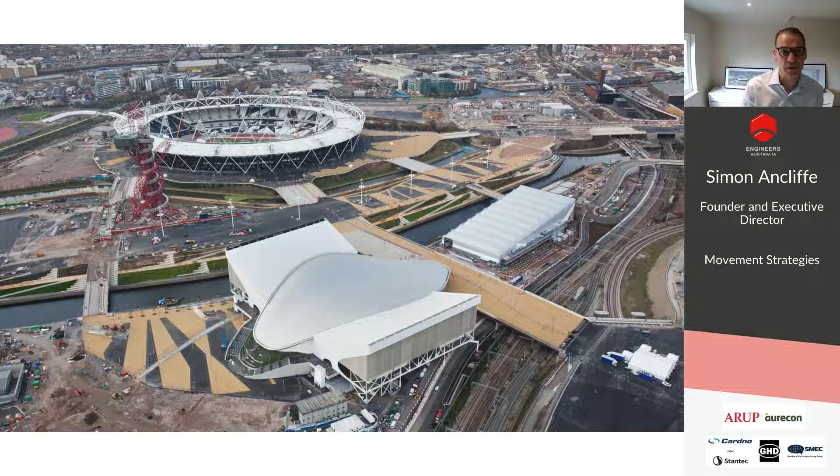And that's shown in the next slide, where this is a snapshot from a simulation that I'll run of the Aquatic Centre on one of those two temporary stands. It shows a number of colours. The colours represent people from the different groups. So blue are non-competing athletes, green is media, purple is Olympic family, orange is wheelchairs and their companions, and yellow represents general admission. And you can see those groups are separated, and that's because the Olympic rules require that Olympic family are separated from media, separated from non-competing athletes, separated from general public.

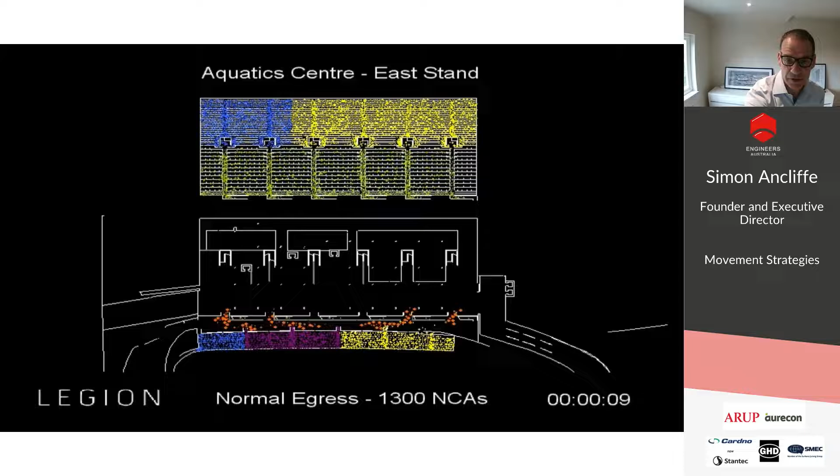And so the movement pattern is quite complex in this venue. And here we show a simulation of people leaving under normal egress. In this scenario, there were 1,300 non-competing athletes. And the people are making their way to lifts to be carried away, or to stairs to get out of the building within a certain time. So the concept of operation for this venue is complex for the games.

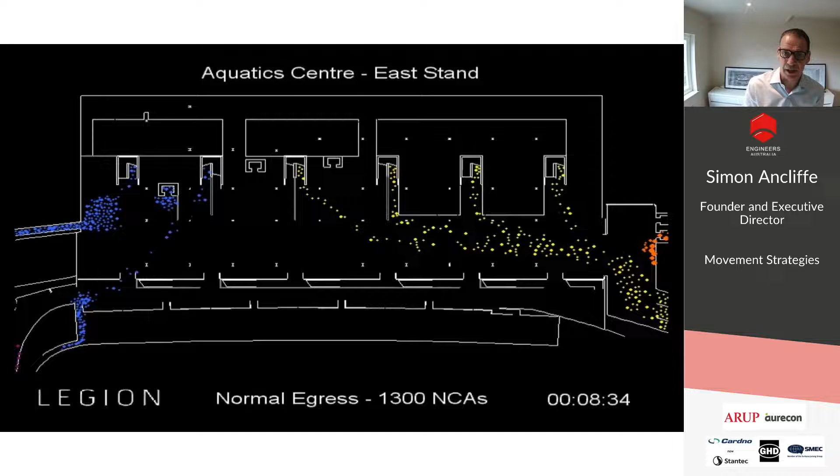And of course it's also a temporary and permanent structure, making it more complex and costly as well. So it's a common theme that you need to understand the concept of operation for venues before getting into the design.

And that's true of the Olympic Park as a whole. One of the other things I want to tell you about planning for Olympics is that it takes a number of years. For us in London, we had the Games awarded in 2005 for 2012. Brisbane has a bit more time, but conversely Melbourne has much less, for the Commonwealth Games.

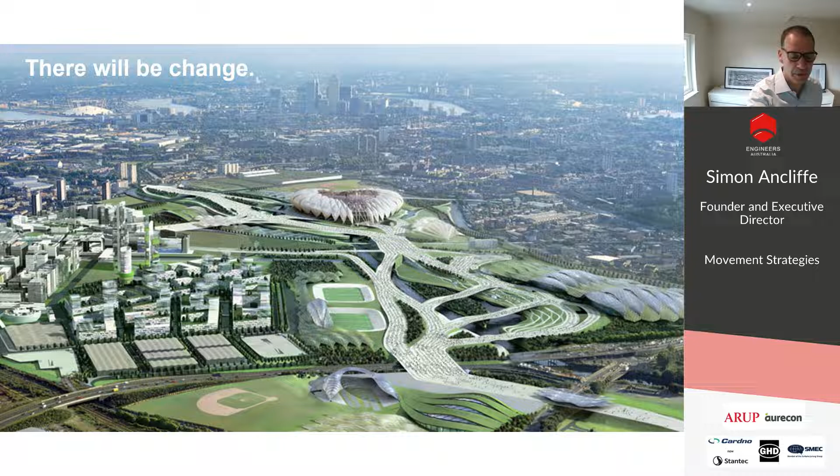So this was the master plan presented in the bid and subsequently developed. It shows a model of an Olympic stadium, a basketball venue, lots of wide paths through an Olympic park leading down to a river with 3 bridges. You can see a baseball centre, hockey pitches on this side of the river, and this was a fencing venue. In the background, you can see what is now the O2, but was previously the Millennium Dome - an asset that wasn't very successful in its original form, but went on to become a very successful venue in legacy. So let's see what was actually built, and you can see a rather different looking Olympic stadium.

What was the basketball venue is no longer there and has moved up to here. Hockey pitches have moved across to this side. You can see a velodrome in the foreground. You can also see an unfortunate bit of infrastructure in the Olympic Park, which was an electricity substation that couldn't be moved. And where previously there were 3 bridges, there are now only 2.

Crowd planning had a fundamental impact on all of those aspects, except the substation, which couldn't be moved and was in the way. But you can see the size of the park, the general circulation area, known as the common domain, was affected by crowd planning. In other words, we specified the size, as we did the width of the bridges. You can see these are sizable and expensive bridges, and there were 27 of those in the park. We also influenced its shape, and I'm going to come on and talk about how that happened and why that was the case.

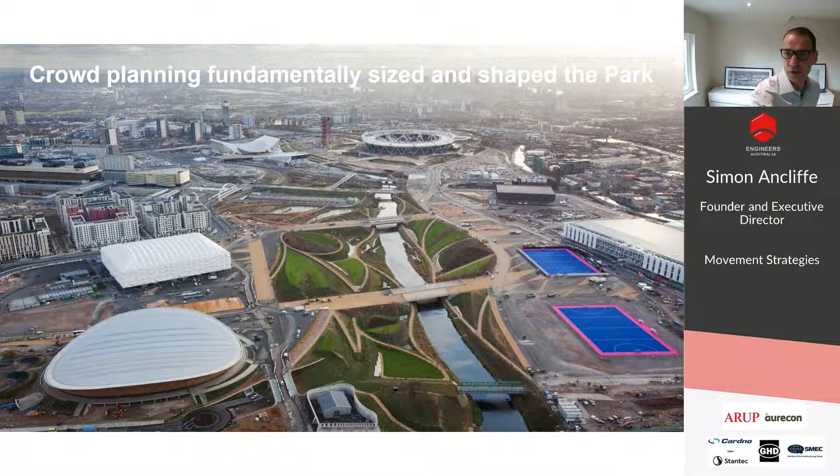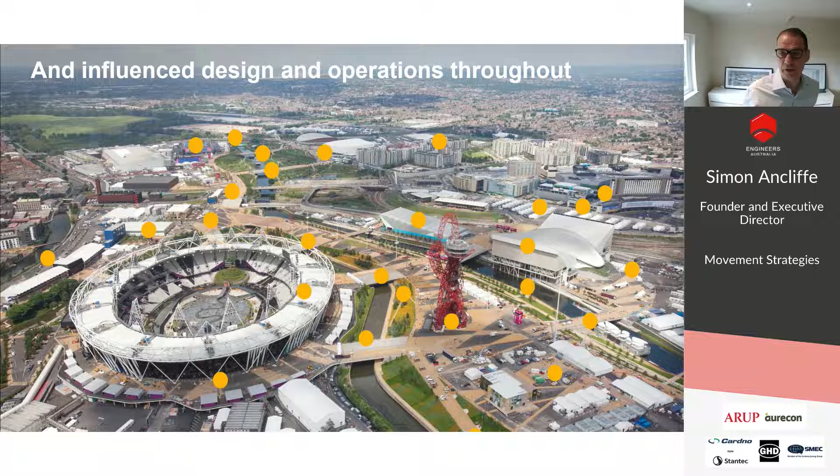But you can see that the baseball and fencing have gone, recognising the cost pressures as you start to develop the games. I've also put in on this diagram a dot representing everywhere that crowd planning had an impact in this picture - both design and operation. A common theme I want to talk about is the integration of operation, the concept of operation into design. So how did we go about that?

First of all was setting the crowd planning principles. There were no design guides, and there aren't for an Olympic Park. So our overriding principle was that the park needed to be comfortable but busy if it all goes to plan. But we would accept uncomfortable, as long as it was safe, if it doesn't go according to plan.

We then started to quantify those by putting the design principles into what was called a crowd movement data book. That was also important at the time because we had new guidance coming in from the Sports Ground Safety Authority in 2008, just as we were about to write the design standards, setting out the numerical parameters for how crowd flow should be accommodated. There was a change, so we had to accommodate that.

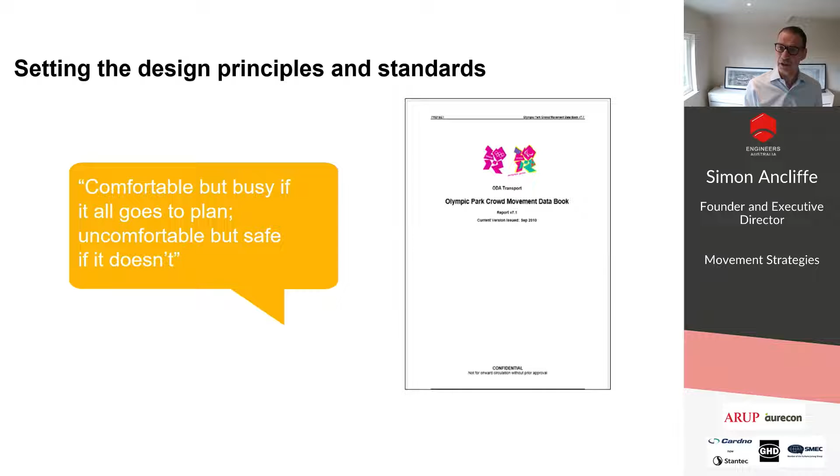At the same time, we also wanted to understand how many tickets were going to be sold and how many people were in the park. The data book captured all that data and other parameters like security screening rates or transport plans into one document, which was version controlled. So as change happened throughout the development of the games, we were always able to reference back to a common set of assumptions, which is important when you've got thousands of people in different teams from different functions or different venue design teams, all trying to bring together an integrated plan.

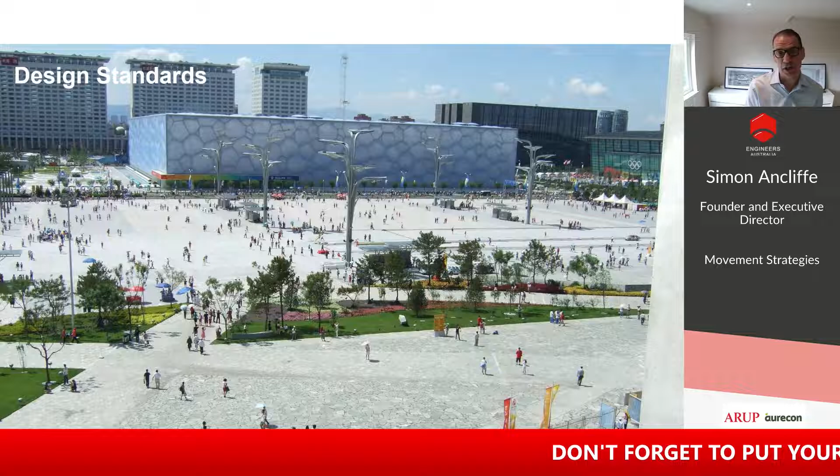In terms of design standards, this is the Olympic Park in Beijing, looking across from the Bird's Nest Stadium to the Water Cube, their aquatic centre. You can see there's plenty of space there, but arguably it was not vibrant enough - in other words, there's too much space per person there to give it real vibrancy. And it was hot and rather sterile in that park.

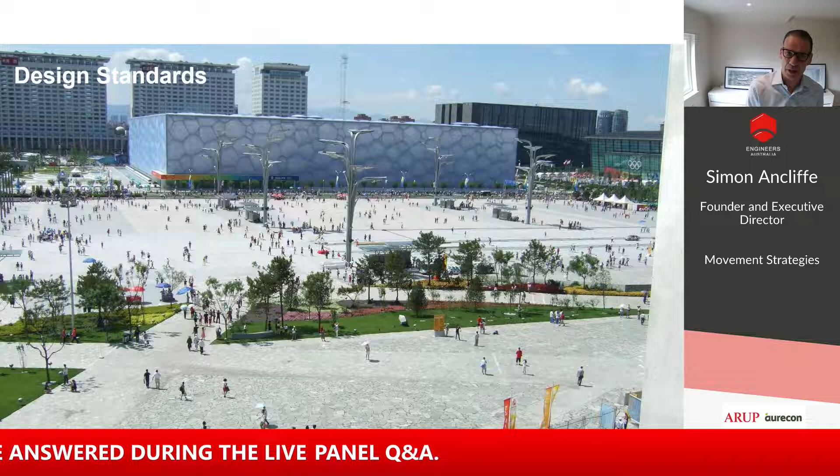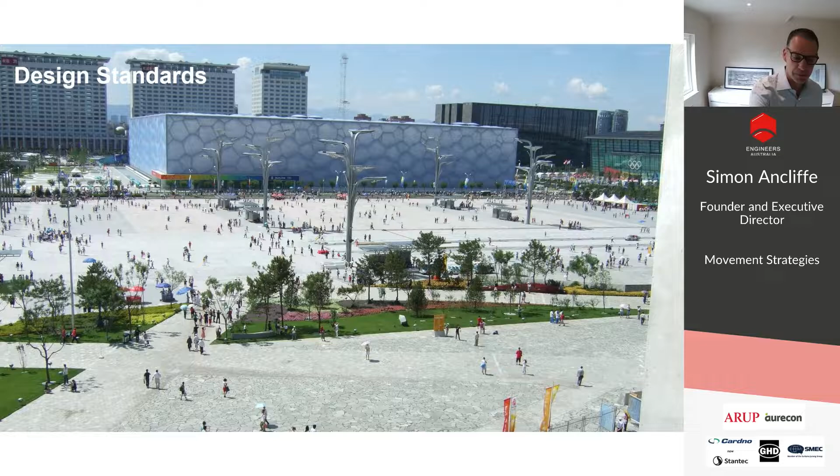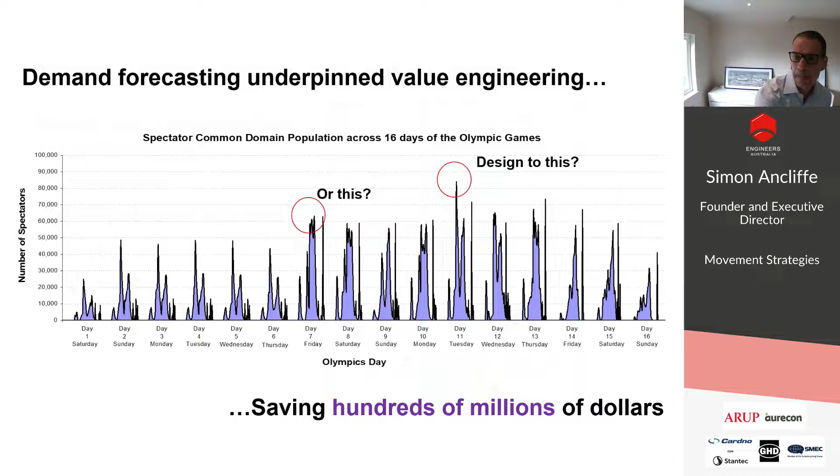The next thing we did was try to establish the movement patterns in the park, and again that will be the case for a precinct or a city - where people are coming from in terms of transport, and how they walk around the park. So we considered the arrival and departure profiles via each transport hub, and then started to think about how people would circulate if they were visiting one or two venues.

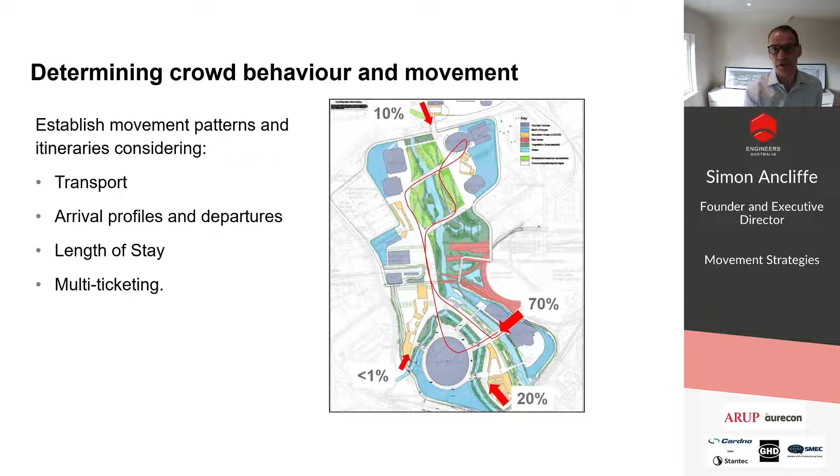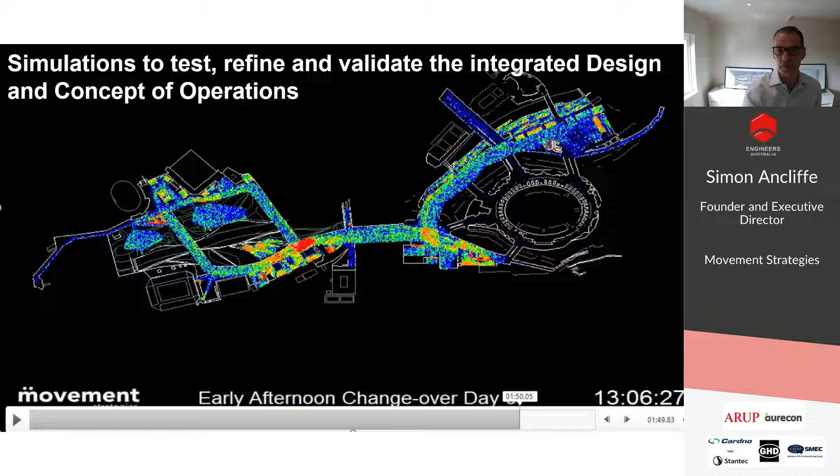As we ran this simulation on a scenario - the early afternoon changeover between the morning and evening sessions of the Olympic Stadium, which we had identified as one of the busiest periods - it allowed us to see whether the circulation widths in the precinct were wide enough, and where the orientation and arrangement of venues created difficulties. There's clearly an area here in red representing high density, where we had to pay attention to what kind of merchandise, food and beverage overlay, toilets and other facilities were in this area opposite this junction. So the design changed as a result of this kind of analysis.

In 2005, when London was awarded the games on 6th of July, unfortunately we had a terrorist attack on 7th of July, 7/7, and so security was a major consideration throughout the games, as it always is now. The others, by the way, were transport and cost - those are the constant themes that people try to evaluate and make work throughout the planning for the games.

And of course, this thing about cost means the organising committee wants to get revenue, and one of the main ways of doing that is from sponsors' hospitality.

This prime spot meant the organising committee wanted the security screening to be as minimal land take as possible. But of course, everybody knew that security had to be good. So we had to test what the security process was, what security equipment was needed to implement that process, and how many people were going to arrive over what time periods, and from what routes.

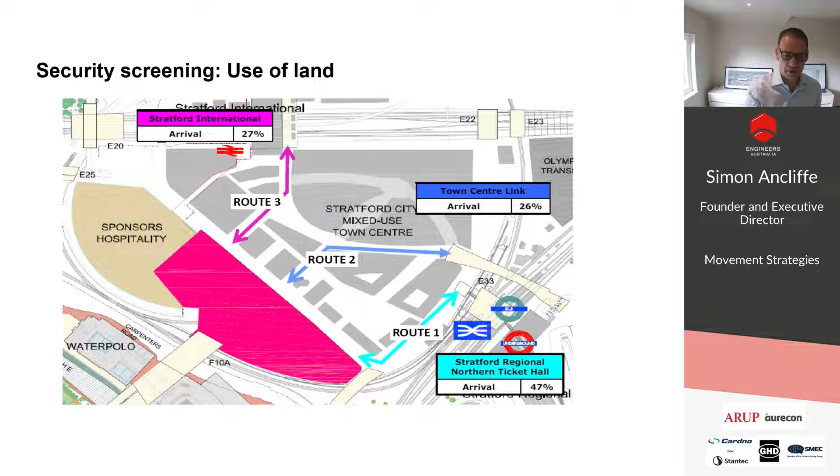I'll come on to transport in a bit, but people arrived at this major entrance via three different routes. So we did lots of scenario testing and design work before arriving at a particular design, which was then tested again using crowd simulation.

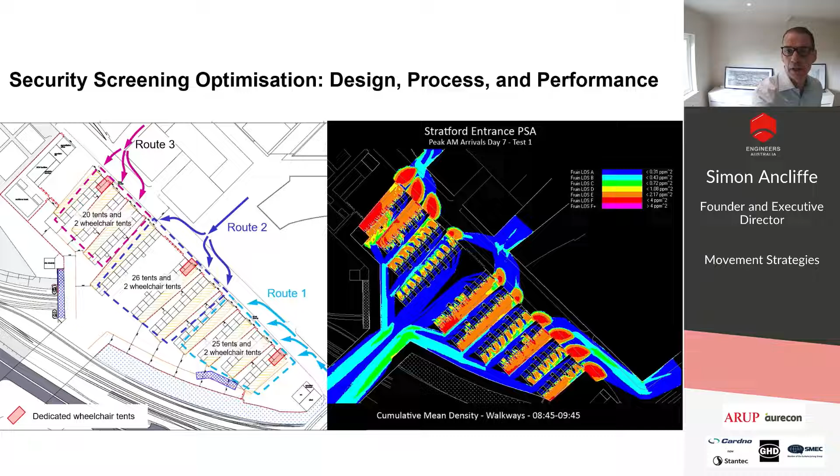Here's a schematic of that. In blue you can see I've put three subways under the railway lines connecting the station. The yellow represents all the different platforms, 17 of them, serving various train services. In purple there are three ticket halls: the Southern Ticket Hall, the Mezzanine Ticket Hall, and the Northern Ticket Hall. So it's a complex station, and last year it was the 5th busiest station in Great Britain.

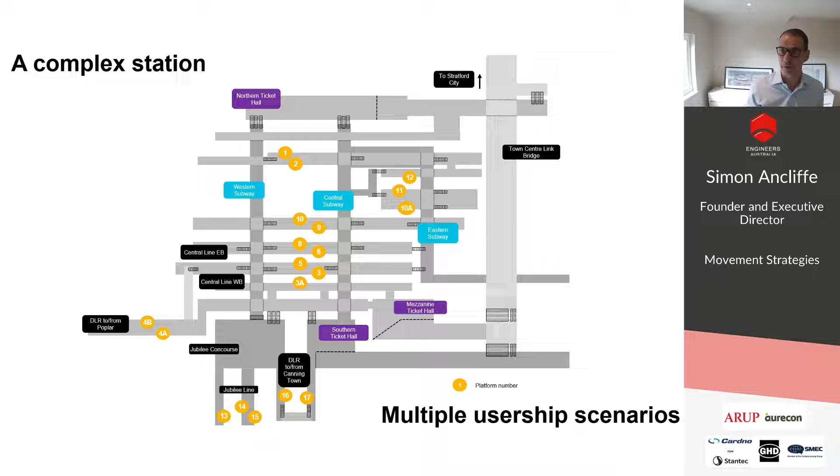Making sure that the new complex station could work under all those scenarios was quite a piece of work. And we also had to make sure it worked during the construction process in advance of the Games as well.

So once again, we did the analysis, but ultimately it led to doing a crowd simulation. Here the red represents the queue. In this case, it's not a problem as people go down the stairs from this Central Line platform. But the central thing we had to test was to make sure this queue could clear before the next train arrived, so it didn't build up back along the platform, which would be unsafe.

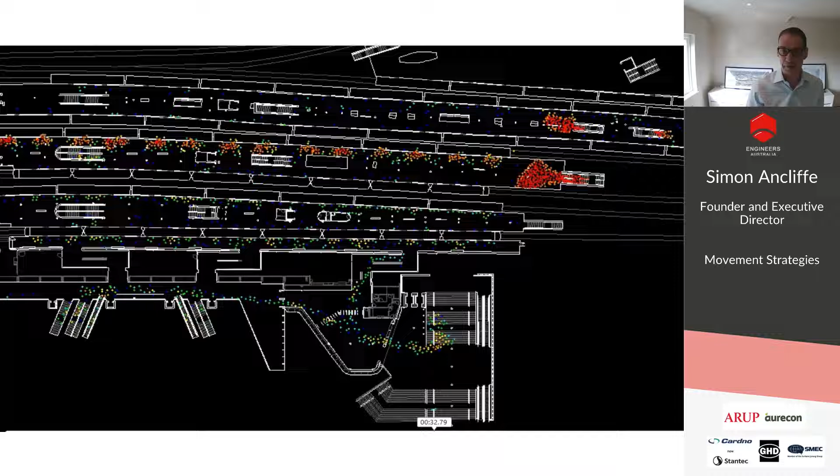You may remember I mentioned the Stratford Steps. Those are shown here next to the Mezzanine Ticket Hall. There's the bus station, there's a queue for people coming in, and people could head off this way also to the shopping centre. This was part of the last mile.

Last mile, sometimes called grey space, is the area between the transport hub and the venues. Over the years, during the London Olympics but also in years subsequently, planning of the last mile has become more of a major exercise for mega events.

This location shows some of the problems. When we first started planning it, there were a number of different stakeholders involved: the stakeholders for the bus station, for the transport hubs, Stratford City and the local authority, and the organising committee, who would have to manage the crowds down these steps.

Everybody wanted to say they will do it, but after a while, as they realised the costs and responsibilities that came with managing the last mile, they actually wanted others to do it. It's very important in the last mile, where you've often got overlapping land ownership and therefore responsibilities to manage the risk or financial transfers of the cost of operation. So planning for the last mile, which is uncertain and often public access because people may not be ticketed, can be quite complex. I am undertaking another mega event where last mile planning is coming later in the process, and it throws up some difficulties.

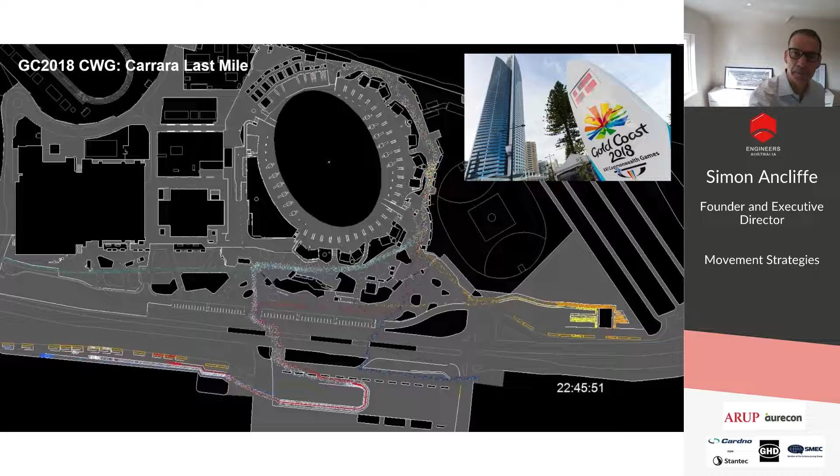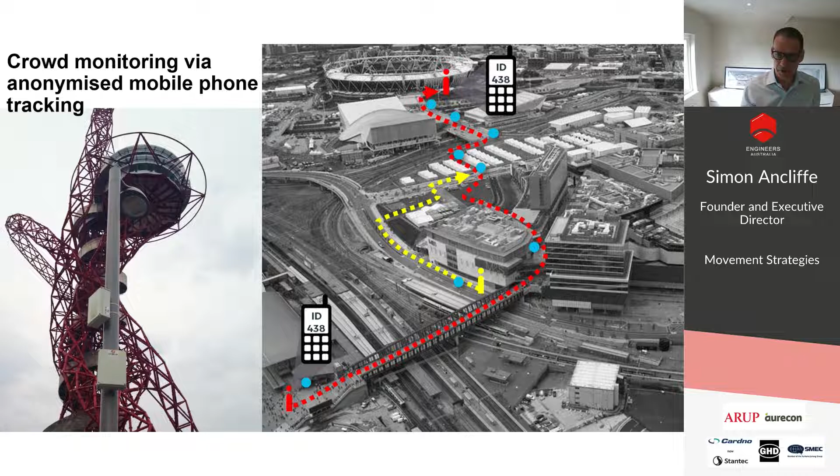During the London Games, we used Bluetooth to monitor the number of people coming each of the routes, in this case shown in two routes. The blue dots represent where there was a location for a monitoring system, and at that time we used Bluetooth. The reason for that was we wanted to understand the length of stay of people within the Olympic Park, because the length of stay affected the overall number of people in the park, and that was obviously a safety consideration. So we wanted to understand that, and we wanted to understand how these two routes were performing and what was the delay at the security screening area. So we put up Bluetooth sensors to understand. These days, people tend to use Wi-Fi because more people have Wi-Fi on than Bluetooth, but there are different ways it needs to be analysed because the pickup rate is not quite as fast.

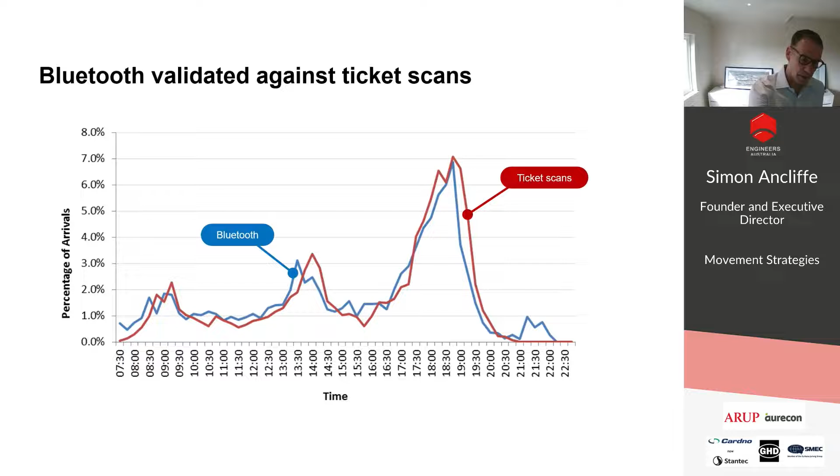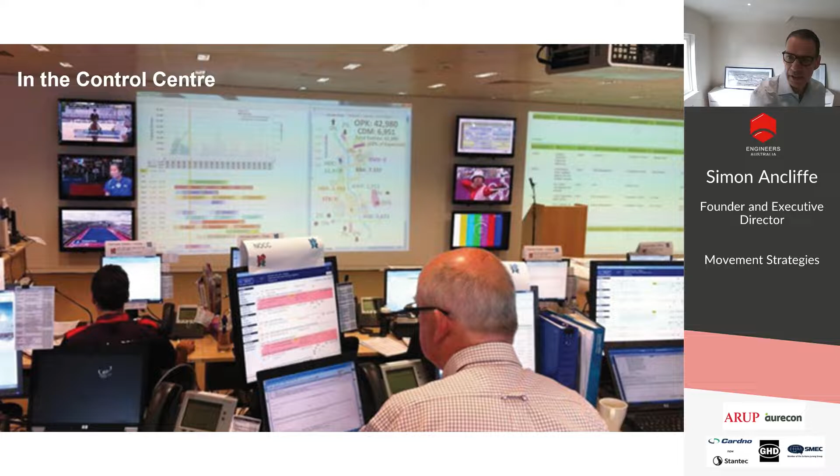We checked the Bluetooth against ticket scans. As you entered the park, your ticket was scanned, so we were able to verify that this remote monitoring worked. We used that in the control centre, where the data coming in was compared against the forecast we had from the previous day, or the forecast for today's activities, which could be compared with how the park and the transport system were actually performing. We could also use the evidence from previous days and people's behaviours to predict what might happen that day, and that was enormously helpful in a number of different ways.

So we measured the population, the length of stay, and their entry and exit routes, and that allowed us to forecast the next day's activities. One consequence of that was that we closed the Westfield for the two busiest days of the Games. We knew that we needed that extra capacity without the attraction of that retail centre. Obviously that is a large impact decision with financial consequences, so it had to be well evidenced.

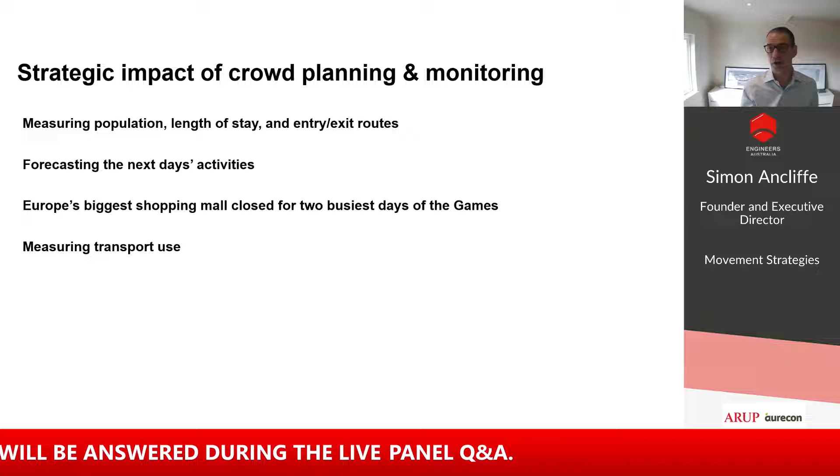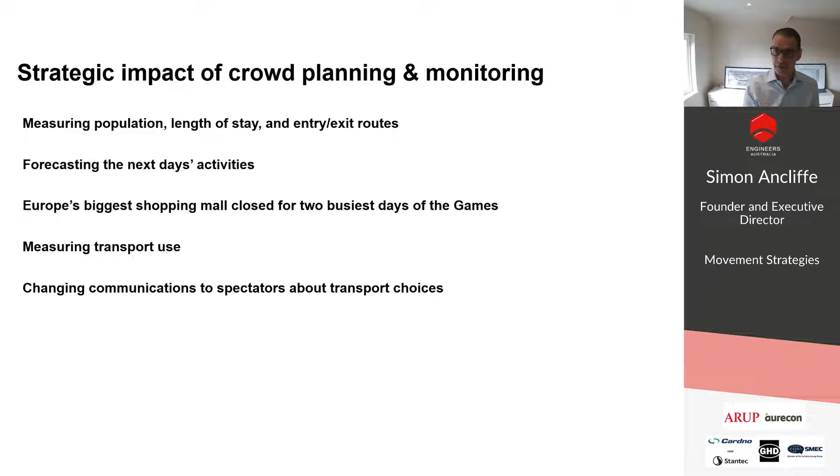We also measured the transport use. There were a number of different transport routes to the Games and to Stratford Station, and by measuring that, we could talk to spectators about their choices and encourage them to use different systems that would allow them to get to and from home more quickly, so that the transport system worked in the way that we wanted it to.

It was also true that we could say in the papers in London that day, or on the news, 'this is what happened today, and this is why it happened. It was entirely expected, and tomorrow this is what's going to happen. So if you don't want to be delayed, don't go by this station, but alternatively go by that station. Everybody else, it'll be business as normal.' And so that absolutely allowed Transport for London to get on top of the media and communications about what was going on.

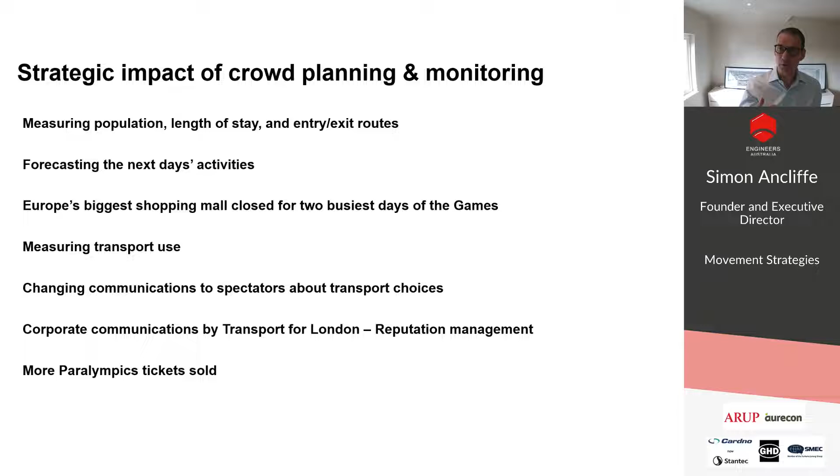And we were also able, because we understood behaviour, to sell more Paralympics tickets, generating more revenue for the Games.

Coming off the Games, one thing I really wanted to emphasise is that an important part of crowd planning, when using existing venues for Games, is that they'll undoubtedly require refurbishment, and normally they'll be closed while that's going on. But in some cases you want to keep the venue operating if you can, which has financial consequences. That could occur at the Gabba, where there'll need to be some upgrading of the venue and potentially the precinct around it, possibly quite significant. If that's the case, it makes financial sense to keep the Gabba operating as long as possible.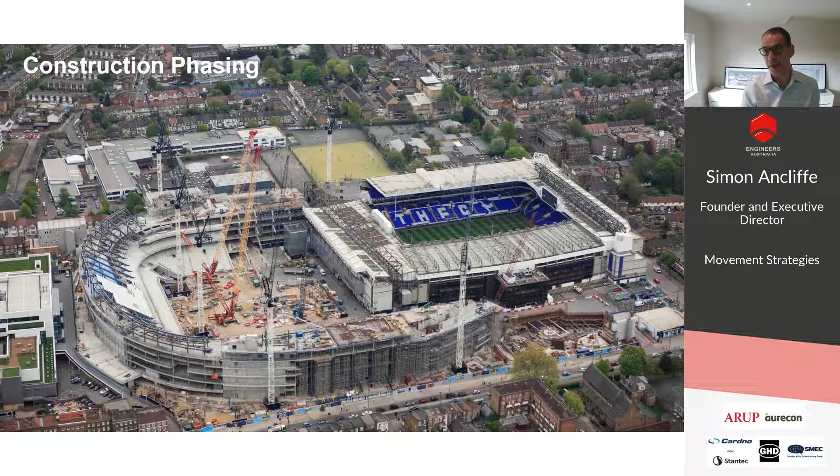So at the start, I said I wanted to talk about the value of crowd planning. First of all, the Games was voted the best Games ever by the IOC, and got a gold medal for that. I think that was in part due to the visitor experience, but it was clearly based on ensuring it was a safe and secure game.

So back to the original question: can't we deal with safety and security two years out? Well, actually, we started to deal with it six years out, and obviously many people were involved in ensuring it was safe and secure, but crowd planning was part of that.

We helped the organising committee and the delivery authority get licensing and planning approvals necessary to operate venues. Sometimes that was through analysis, other times through using simulations to communicate to non-experts about how it could work.

We can help with construction phasing to make sure the venues can operate. For example, Westfield, which was still under construction during the Games, allowed for sufficient walkways so people could get into and out of the Olympic Park.

We absolutely reduced the risk, and by planning beforehand and getting everybody on board, we made sure it worked right first time. We saved hundreds of millions of pounds or dollars in costs for the Olympic Park, and also made the park easier to operate.

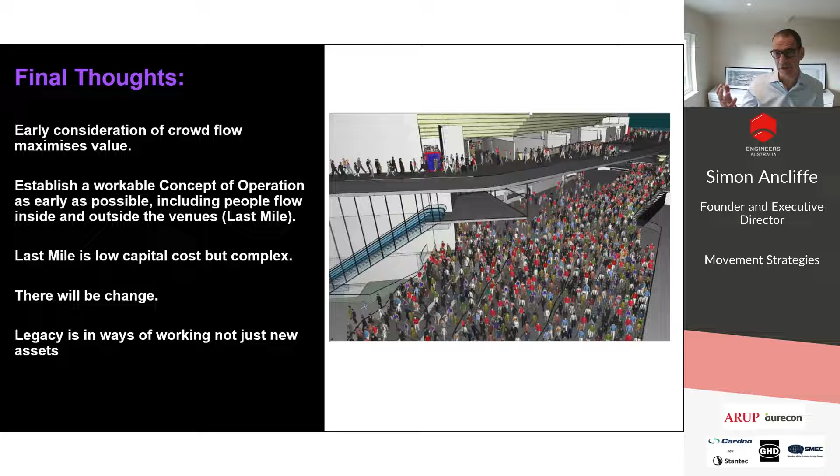To the right, there's a simulation now in 3D. The way that venues and transport assets and indeed games are planned now, we've moved from those old 2D simulations to 3D and to digital twins. And that for me is a setup for the next presentation.

So at that point, I'd like to take questions, and I thank you for your time.

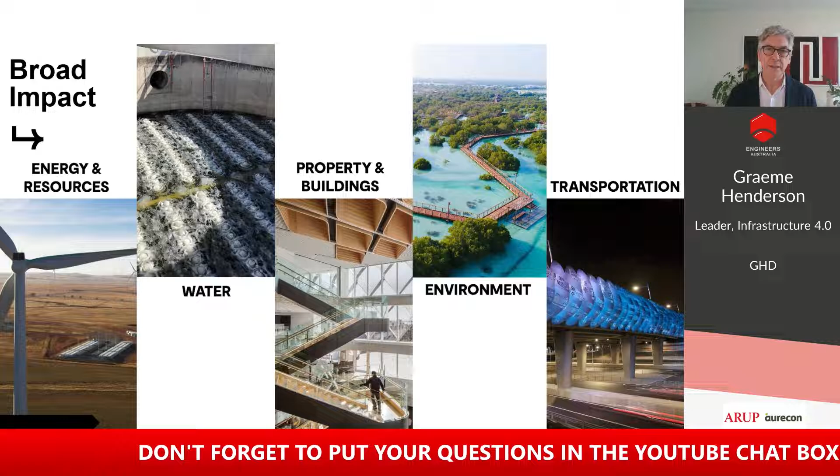Now, we understand that the impact from this event will be very broad, and it'll cover many of the aspects that we as engineers get involved in on a day-to-day basis. So how do we do that?

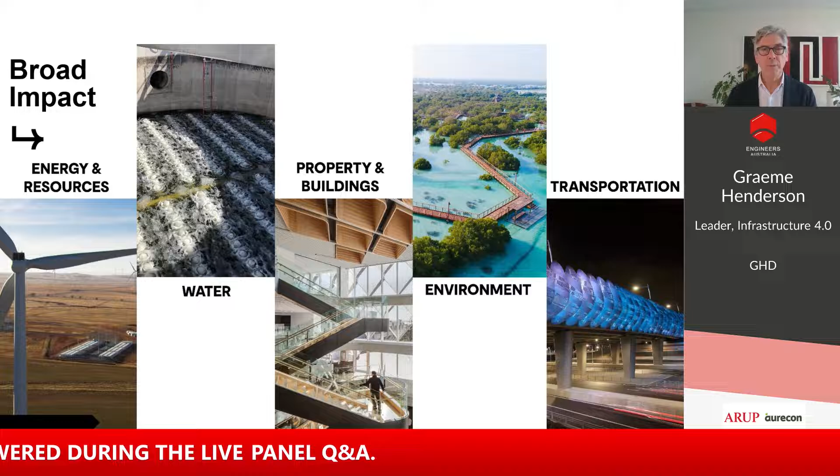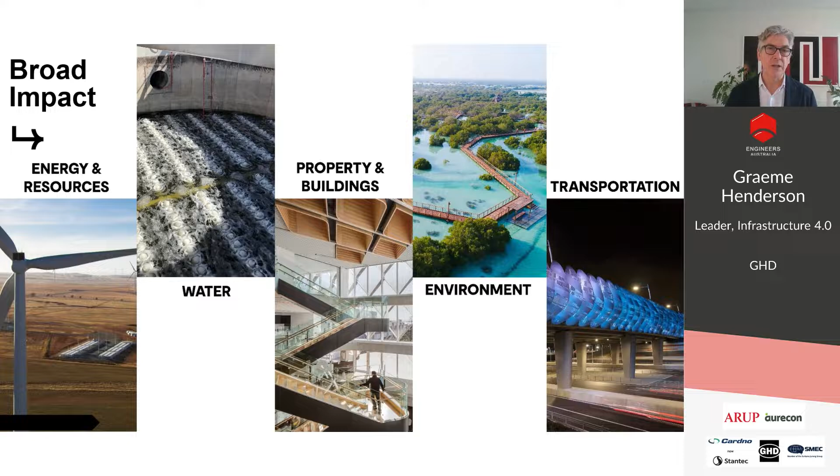Simon talked about virtual optimization to support the event. I'd like to take that a step further now and talk about how we move from optimizing the event, but optimizing the planning of the event, optimize and connect that to construction and management of the assets and management of the long term, and then the repurposing of those assets going forward.

So when we're thinking about that, there are some guiding principles that we should be thinking about when designing a digital twin or a virtual twin. These have been adopted from the Gemini principles, part of the Centre for Digital Built Britain.

They help us think about the opportunities before us. It's really important to focus on things like public good, the insights that help us through the life cycle of the assets created, the environment within which they reside, and the value generated out of all of that, and the interaction with the whole program and the events themselves. Sitting underneath, as the foundation, is this basic governance and framework that ensures we are accountable to the levels above.

One of the key issues is making sure the asset information occurs in the subsequent layers. If you take another view, you can see that we start with an event in the middle, but over time that event takes on a whole other dimension. How does that reflect into the entire ecosystem?

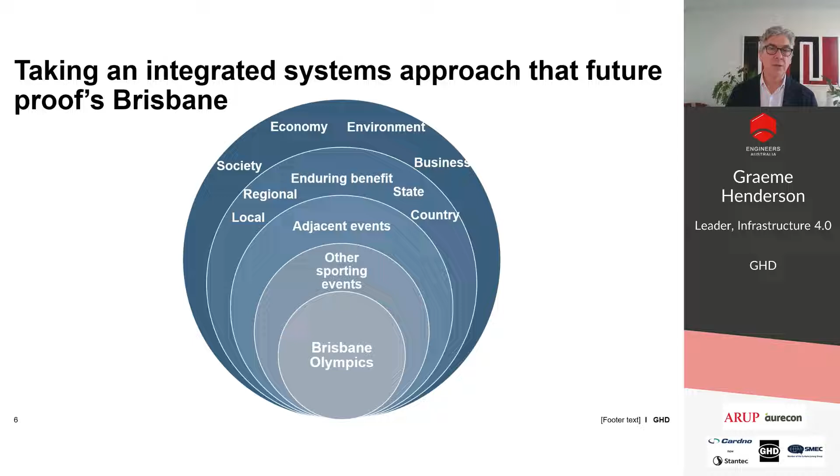Let me explain what that means and how we as engineers could bring the best we have to this historic event and the opportunity before us. We understand that infrastructure itself is quite a complex connection of assets and thought processes that occur to make something like an Olympic event successful.

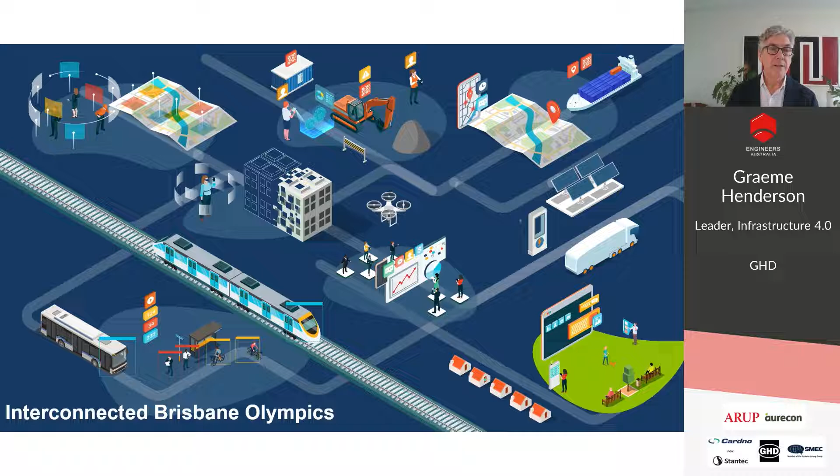Think about some of those elements: there's a planning and strategy piece tied up in all of this. The assets themselves are created and need to be optimized to make sure they fulfill the obligation made to the business case for the Olympics. Flowing through all of this is the information and data, and the way that engages and helps the stakeholders and communities, and how we might streamline that through improved automation.

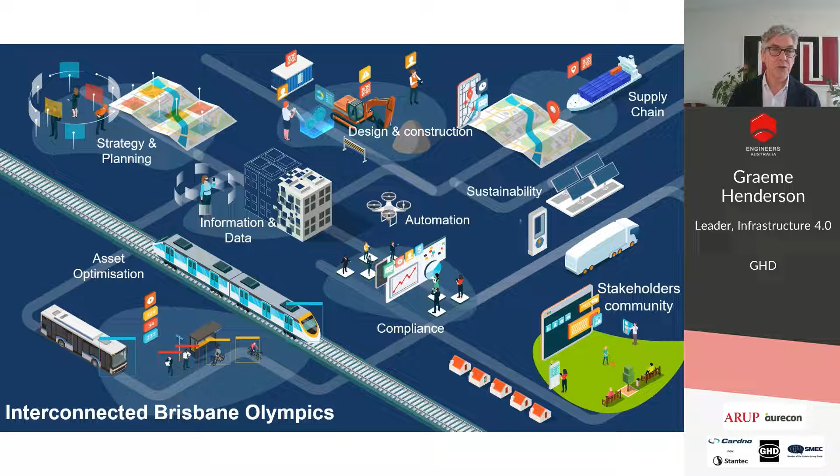Ultimately this generates a sustainable situation for both the Olympics and what's left behind, and how that interacts with supply chains, both in terms of construction or maintenance or service activities, all the way through to the event itself, and then into the long-term legacy of what gets left behind. Of course, the design and construction of all of this needs to be held in concert.

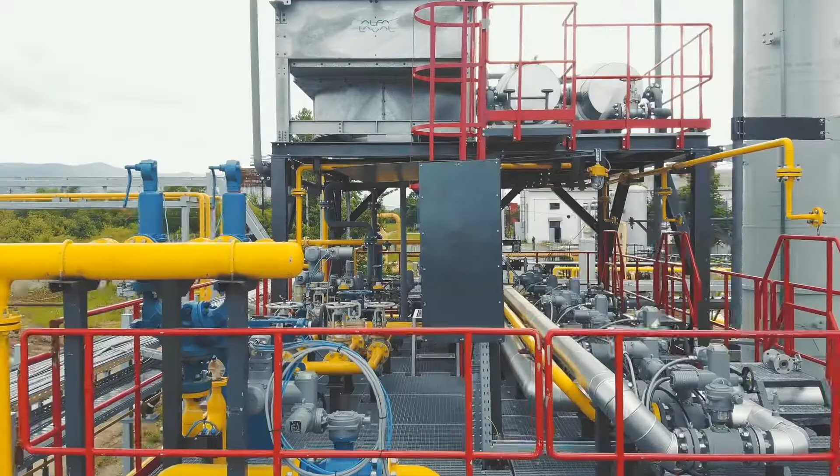So what I'd like to do now is play a short video to describe the way we think about this, and how we can bring a systems approach to starting to bring the best of what we have to this journey. We've been thinking very much about our clients' business and about the challenges that they have.

The demands on our clients and their business enterprise are many and varied. We created a framework that enables us to identify those areas and then think about how they are dependent on each other.

The framework that we've developed starts with the client's business at the centre. And then we frame our client's business within its ecosystem, recognising that there are a lot of interdependent elements that impact on their business. But we really focus on tying those elements together to elevate the entire business outcome for our clients.

So just being successful in one area doesn't necessarily mean that you can be successful overall. So very much in our thinking is this idea of making sure that we can optimise the whole, not just the individual.

There is no doubt that the world is getting more complex. It can often be very attractive to think about just going from problem to solution in a straight line, and I think we need to be very careful about thinking of this as a simple solution. We need enough pre-thinking and enough thought in the framework that enables us to make it deliverable, enables us to break it down.

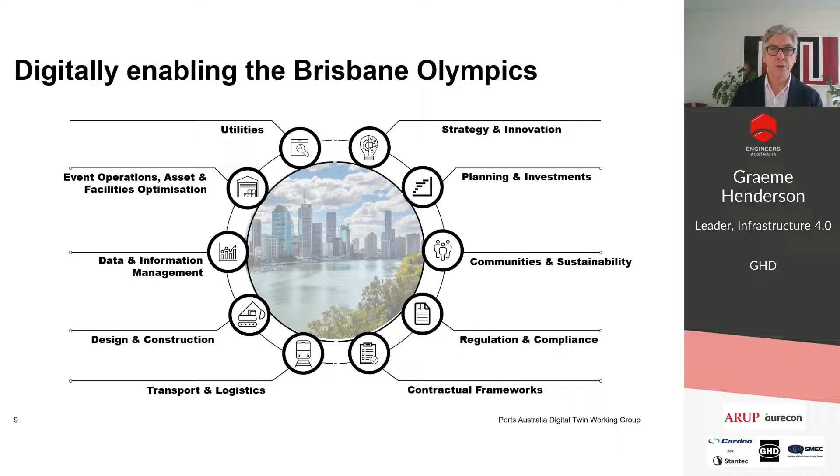It plays, of course, across into the planning and investment. So this codependency becomes extremely important in the way that we think about the opportunities that we have in front of us. So what does good look like in this world?

If we think about this hierarchy and the hierarchy of systems that comes with it, the bottom of this is the actual assets that we create, and those assets don't necessarily need to be just physical assets. They can be natural assets, they can be the elements of the ecosystem, but they are nonetheless assets because they all have to work together to create a better outcome for our community, for our society.

Now, sitting above that is the way that these assets interplay with each other. So you think about things like intermodal systems and communities, clusters if you like. And then we can go beyond that and start thinking about how Brisbane and the regions might interact, the way that they connect up. And then going above that, we start to think about this idea of a unified model.

So again, it's not just the individual functional elements that sit within this hierarchy. It's the way that the elements sit together, nestle together in this overall systems approach. But it does start with this basic understanding of the importance of the assets and the data associated with those assets.

It's not hard to imagine how this approach might actually start to connect up some of the other data sets that we have available to us, to make sure that we actually fulfill this as part of the bigger unified model for the entire state, if you like.

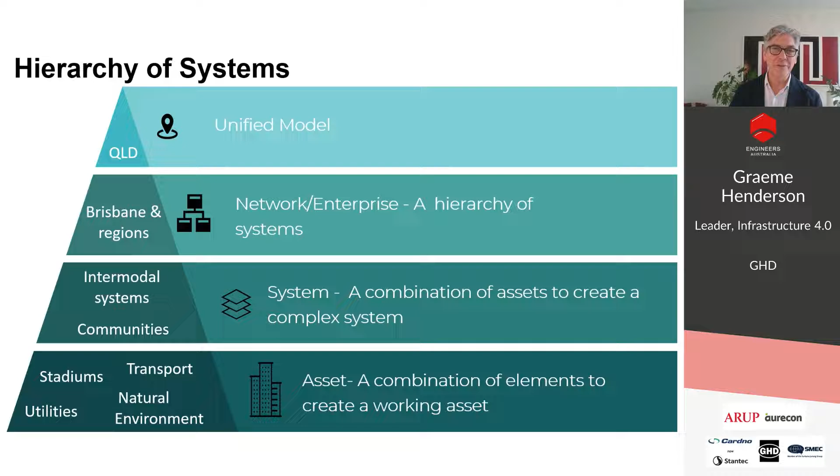So where do we start on this journey? Now, I'm not going to go through each one of these 10 elements, but I would like to cover just 2 or 3 to explore the thinking for us so that we begin to understand this approach.

So if we start with communities and sustainability, we already know, for example, that the IOC have got a sustainability strategy that talks about before, during and after the Olympic Games, and we understand that they have clustered these into these areas. And what's interesting about this is that when you look at them, you start to see that they are in fact themselves linked together as well.

So, for example, things like carbon and climate can't be achieved unless you actually take into account things like mobility, unless you take into account things like the natural environment. So that thinking pervades the way that we need to think about this. We can balance these things together in that twin world, if you like.

So it's very important for us to think about the experience of people. And the experience of people in this world is not just at the event itself, but it's for the next 9 or 10 years, and it's for the 10 or 20 years or whatever beyond that. So we think about that as the experience that people have from all walks of life in this infrastructure that's being created and linked together.

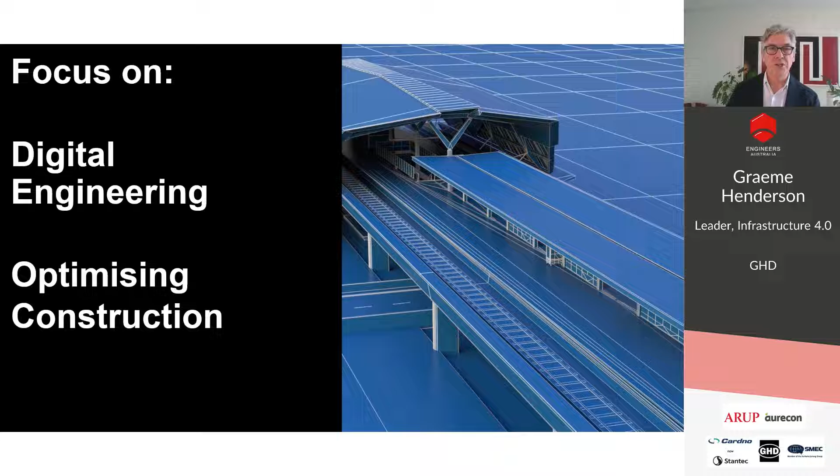Now I'd like to talk about the design and construction activity for this. Clearly, as engineers, we focus on things like digital engineering and optimizing construction and so forth. So a bit of a focus on that for a minute or two.

Fundamental in a successful Olympics and beyond is the application of BIM and a common or connected data environment, which will be important for enabling stakeholders in the Olympics. Now, if we reflect on where we're at with the Olympics, how might we bring this approach to the unique challenges that we'll uncover as the program gathers speed?

Simon made the point very clearly that these events change through their life, and what you think is there will not necessarily be there. So you can think about construction and traffic impacts right through the life cycle, construction all the way through to final use and then beyond.

How do we use it to create and optimize designs? How do we use it to optimize the construction process? How do we use it to make sure that the venues reflect the space and capacity for people? And equally, how do we make sure that the venues that are not necessarily required long term can be done in the most sustainable ways possible?

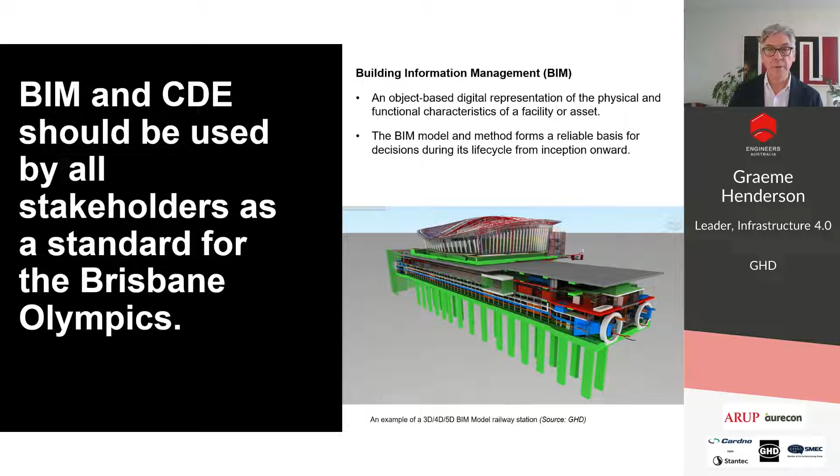So we do have these multiple locations. We do have commitments to net zero. There's already a significant need for adaptation as we go forward. And I think it's pretty obvious to us that what we see today isn't necessarily what we will see in the future. Now, at the starting point for this process, one of the most obvious things that people see are

these virtual representations of physical spaces so that you can engage with people, engage with the community. And that's absolutely a vital part in this entire process. It can be important in terms of wayfinding and so forth. But at the early stages, much of this is about getting people on board and getting the approvals, but also helping in terms of the promotion of these events.

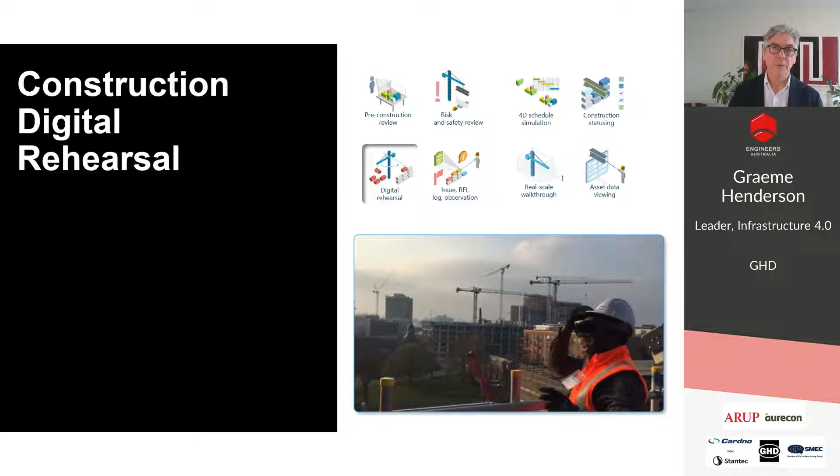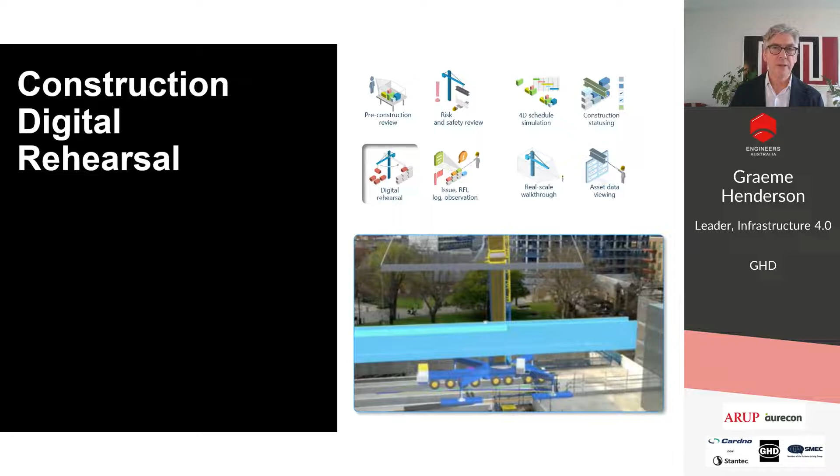So as we elaborate these models, they become more and more valuable. The use cases can start with people movement, but they can then move across into optimising construction, reducing the costs and understanding the challenges that we're going to see through the construction process. They can start as city development processes, but that type of approach can transfer directly across to the Olympics. And this type of twin can help us to plan what we're going to build in the most effective way.

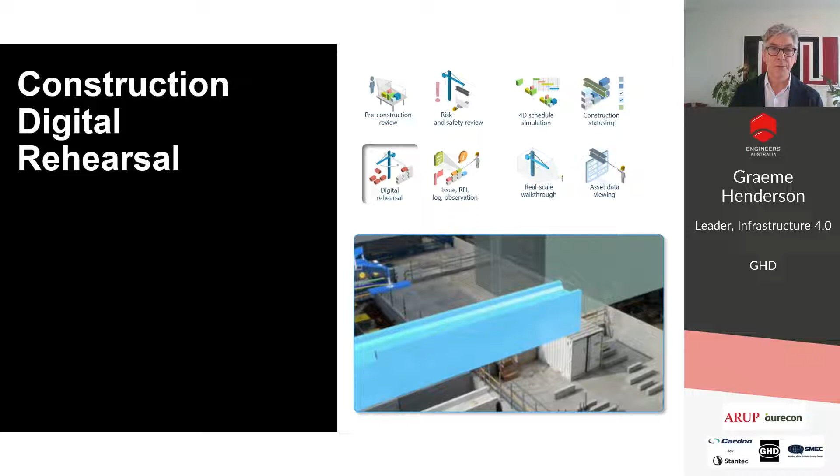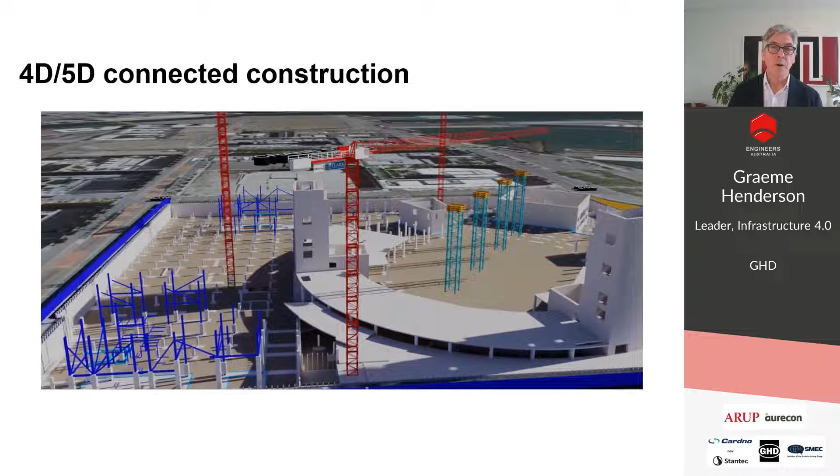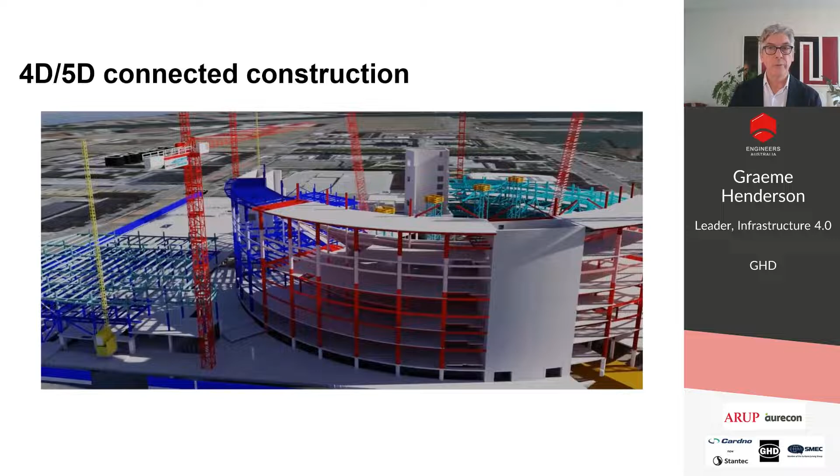And then if you take it to the next level of value or elaboration, we're talking here about moving from what may be considered a planning twin, where it's all about making future assumptions, to a live or dynamic twin where we can start to deploy real-time or near real-time sensors to shorten the cycle time of action, improve the quality of decisions, and ultimately reduce costs and uncertainty.

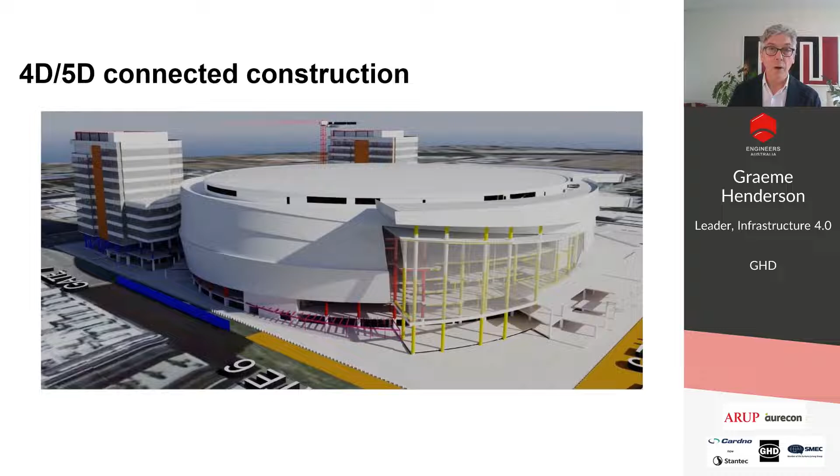Now, doing this will require the use of IoT technology and continuous surveying, the connecting up of equipment, the idea of the connected workforce in the field, sharing mobile data from the field, so that ultimately you can begin to orchestrate in near real time the actual activity for what will become this stadium of the future, if you like.

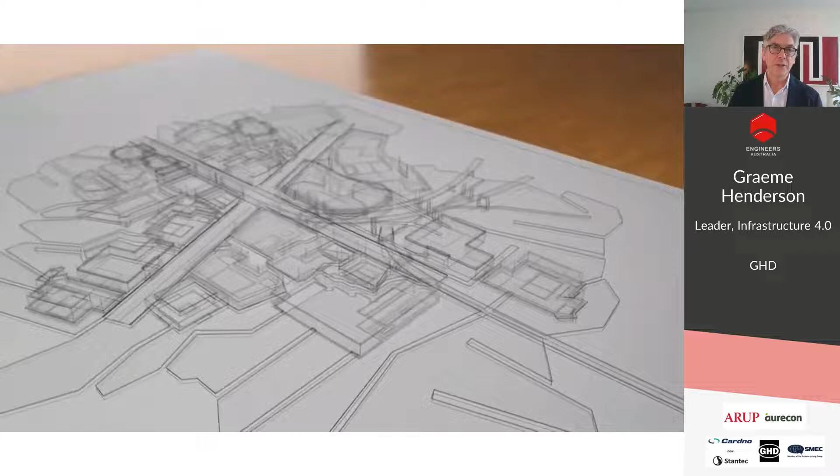So where does all of this fit into the future twin? So ultimately, of course, this rolls up into an overall city and regional environment. And this, of course, can build towards a fully functional and integrated system that will underpin the future development and adaptation of the entire community and the infrastructure.

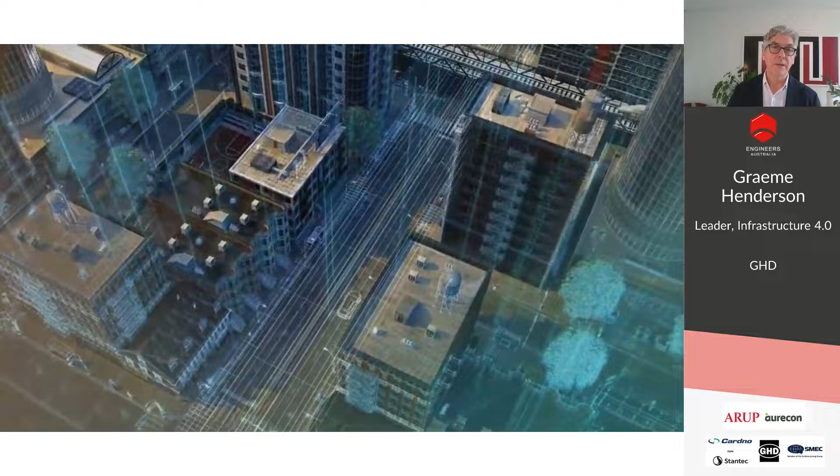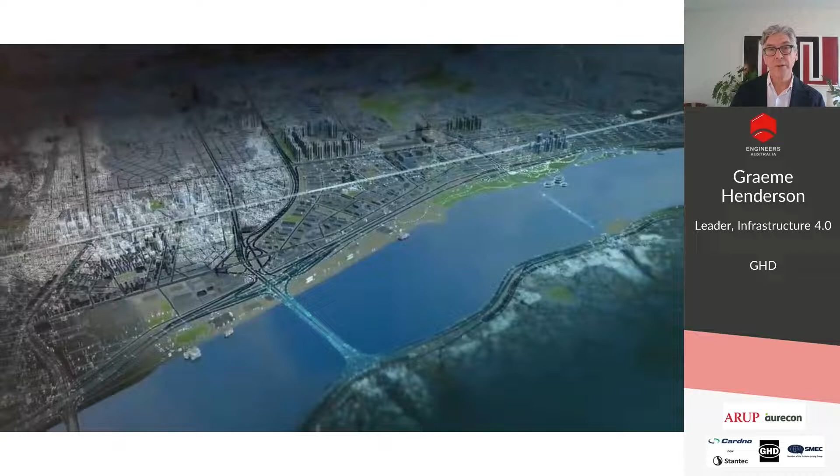The ability to integrate new data sets and create future connected states is well within our reach today, and I can only imagine what it will be like in 10 years' time. It certainly won't be what we see now. And now this type of an approach is well known in some other industries, but it's relatively new in infrastructure, and I think we will see this more and more, and it will become the way that we just work to make things happen.

It can also significantly support the planning process to make us more efficient. Now I'll talk a bit about the planning process. If we think about the overall planning process, and think back to the Digital Built Britain guiding principles, it's the value to all of the stakeholders that needs to be considered here. It's not just the Olympic event, but rather the overall improvement in the ability of government and industry to work together in a sustainable and systematic way for our communities.

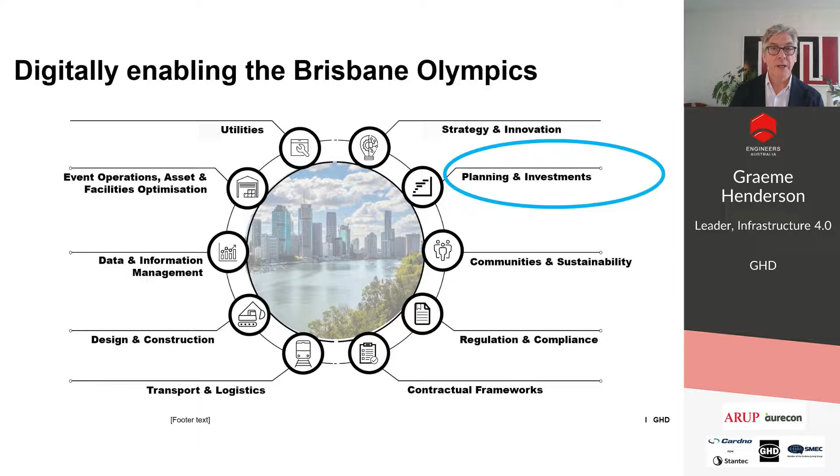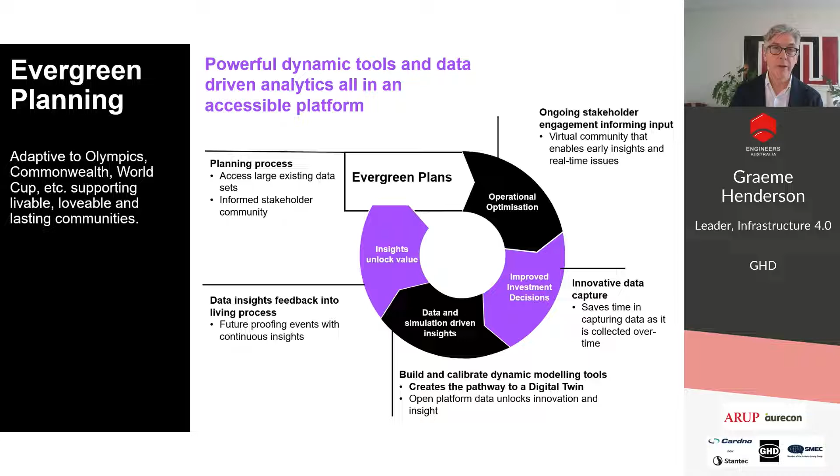That idea starts to permeate what we call an evergreen planning process. So if we think about an evergreen planning process, it's one that actually starts as a planning process, but then goes through a cycle. It's this move from a static planning process, through testing, all the way to real time. And then you end up with this idea of real-time asset management, or performance management, or optimizing for people, or changing the way things are laid out and operated. But it's all based around this idea of continuous, or evergreen, planning.

Put pretty simply, what we're talking about here is that we have real-world problems, and if we can replicate the real world in a model, we create this risk-free space to enable ourselves to come up with solutions in the virtual world that we can then transfer back into the real world. It's this idea, some people call it the digital rehearsal, but it's that idea of being able to optimize things effectively.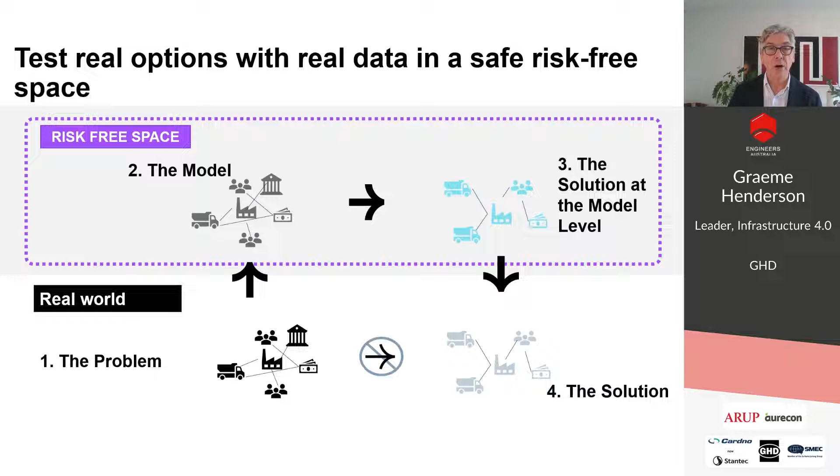What's important about that is that it is based, again, on asset information. Ultimately, I'd like to put the proposal that projects exist in the context of events, and projects to be optimised should actually be done as part of a system. Systems that don't have a focus on the people, the culture, the community and collaboration ultimately won't generate much of a lasting legacy. So the opportunity is here for us to take what's a long-term program and build on that.

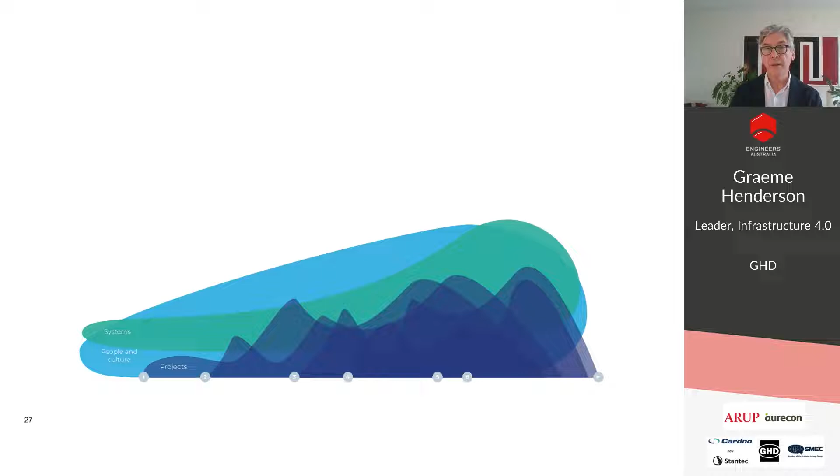So what would that look like? In the thinking here, what we're talking about is putting together the projects that we see as part of an essential Olympics program, but thinking about it in the context of developing an overall system or way of working. And Simon mentioned a bit of this in what he was talking about. It's one of the legacies that we have the chance to leave behind, doing this in concert with the communities that we're supporting.

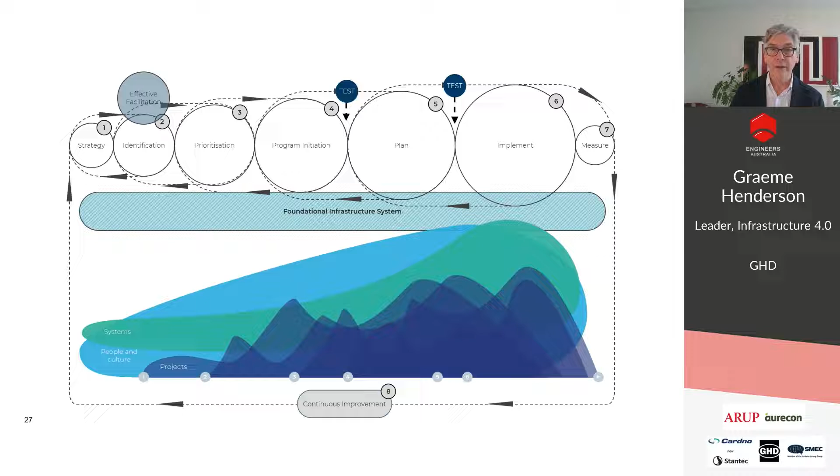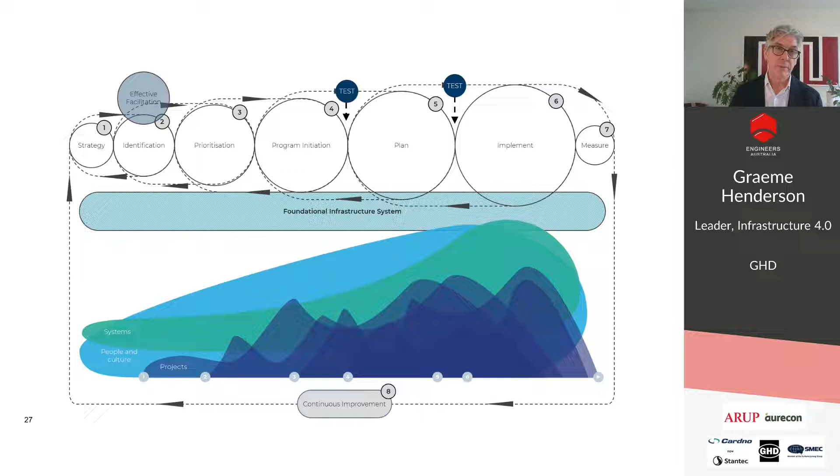So it starts with a foundation layer. It starts with mapping workflows and understanding where the value is. It starts with testing and experimenting, but ultimately where we end up is the opportunity to establish common methods that carry on well beyond the life of the Olympics themselves, and leave a legacy behind for generations as an ability to improve the way that we implement infrastructure in the country, or in the state, at whatever level we want to think about this.

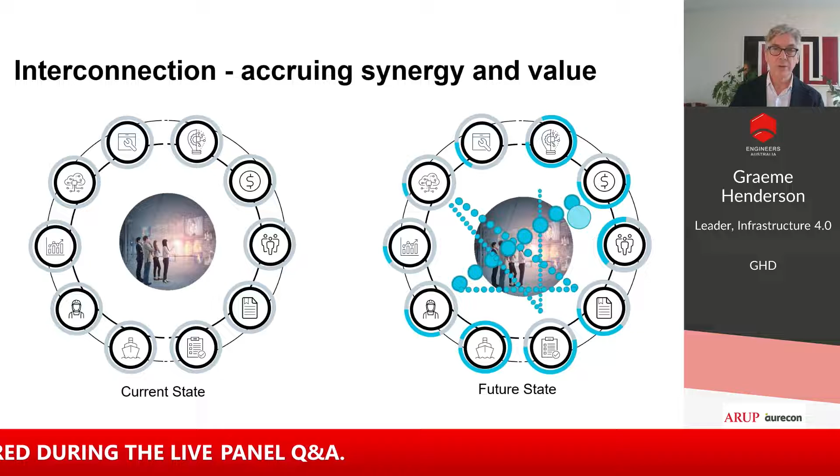So what I'd like to remind people about is this idea that ultimately it isn't success in one individual silo that matters. It's actually the way that we tie these silos together, and we think about the dependency between them. But equally, if you think about the value that you can create through making those connections, and the more connections you can make, in the most sensible and prioritised way, that's how we build value into this approach, and think about it at project as well as portfolio, as well as systems level.

So in summary, what I've talked about is a systems approach, taking a view, elevating ourselves away from a project approach. I've talked about the guiding principles for infrastructure creation, and those principles start to allow us to be more flexible, make better decisions faster, reduce cycle times, and ultimately reduce the cost and improve the reliability of the outcomes that we're seeking. Some of those outcomes can be a liveable city, a liveable region, it can be sustainability, it can be a successful and memorable games that we can all be proud of.

So in closing, what I'd like to encourage us all to think about is the bigger impact that we can also have. The fact that a resilient infrastructure approach for our community helps to connect up the regions within our communities, and helps us think about how we might connect the information and data sets across our community to make sure that we get better critical infrastructure in place, and leave behind an enhanced infrastructure asset, infrastructure system, but a better way of actually generating infrastructure for our communities. Thank you.